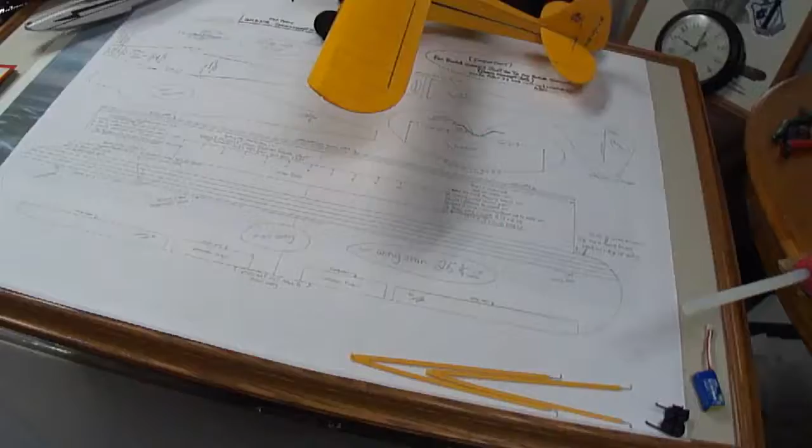Let's see what I got here. I built it out of Great Planes 3mm Depron foam.

Here's a package for it. It's 11.5 inches by 47 inches in length, and it's 3mm Depron. You can get this from greatplanes.com.

You can see right here, here I got a package of it. If you guys order this stuff, it's like 15 bucks for 2 sheets that are in here. I would just go ahead and order 2 packs, like what I got, that way when they ship it to you, it don't get creased or bent. They'll put it in a thicker box.

Alright, now I based this J3 Cub off of the UMX J3 Cub, which I got here. And on mine I went ahead and installed some flaps and all the other little goodies. I got lights on here and everything.

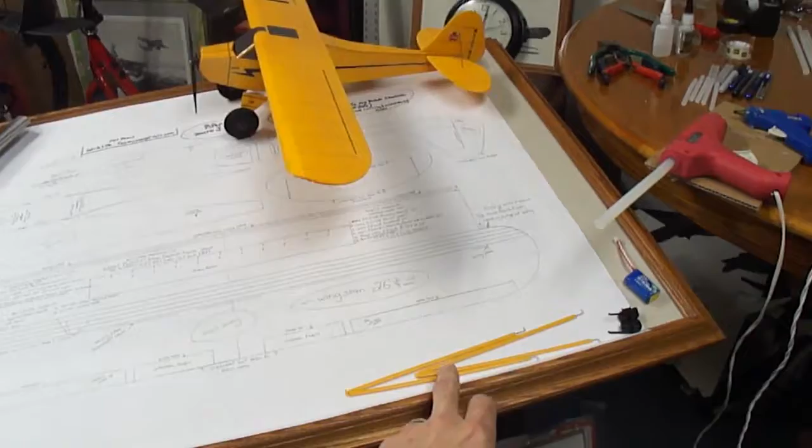And then I went ahead and ordered all the extra parts, like the wing struts, the motors, also the landing gear, and of course the electronics out of the UMX Ultra Micro J3 Cub.

Alright, so what I'm going to start off with here, let's move some of these off to the side.

Now I'm working on another one here. This is based off of the little J3 Cub, you can look it up on YouTube. But this is off the same plans. I just went ahead and removed the tail, the rear of the fuselage, and made my own.

And if you look inside, you'll see I got balsa wood. I just used some lightweight balsa wood, and I went ahead and hot glued it.

And that's how my floats push up through the bottom of the foam into the balsa wood. That's also how I attach the landing gear here, so I can remove these floats and just push the landing gear right through there.

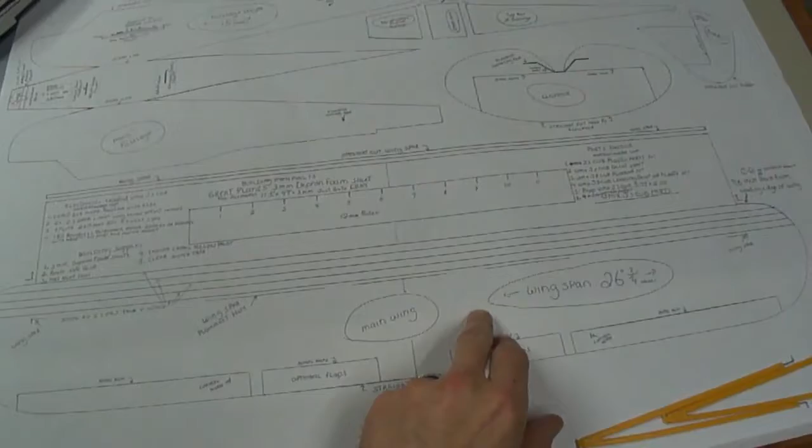Alright, here I got my plans. We're going to start with the main wing. The wingspan's 26 3/4 inches width.

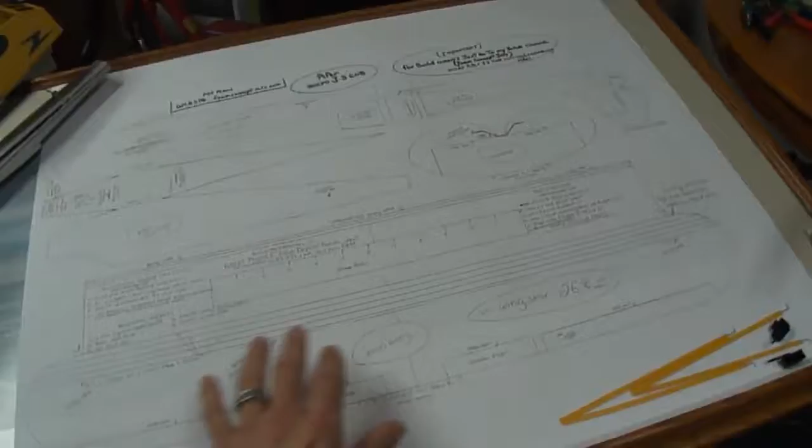Now what I did here, first I'd cut the main wing off the plans, just go ahead and cut it. I already went ahead and cut out all my parts so I can make these videos a little shorter. No sense in sitting there doing all these cuts, they're all just straight cuts.

Here I got my elevator, rudder, main fuselage, top rear of the main fuselage. Got the windshield, and the top of the cowl.

I'm going to go ahead and start with the main wing, which I cut out. I'm going to explain to you how I do this. What I first do is I'll tape the sheet down, tape the plans down on your 3mm Depron. And I went ahead and cut out around the whole main wing.

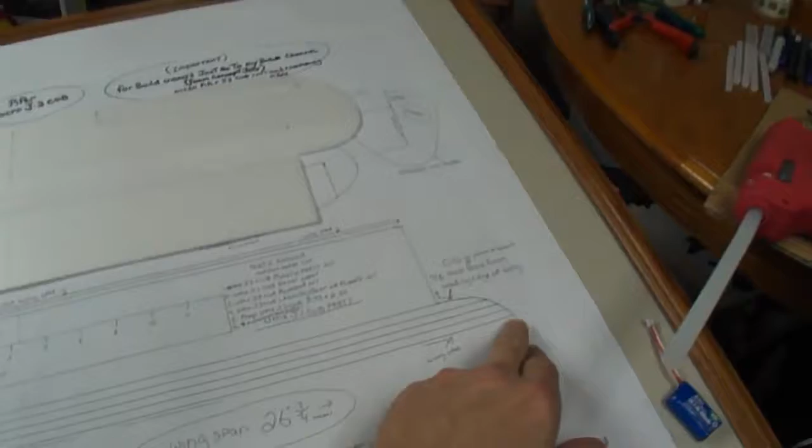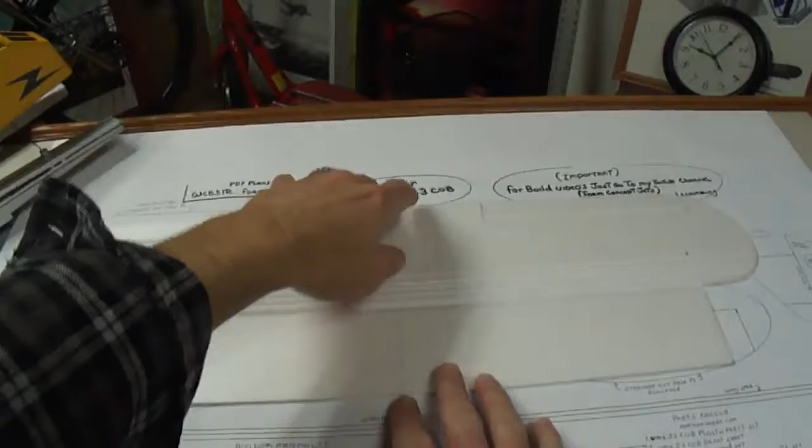Also score all 5 of these lines, and I mean just score down through like half of the 3mm Depron. You can even start by doing that first. Just go ahead and score all 5 of them, then cut out your main wing, just like I did here, which is just like that. Cut it out. Here you can see all 5 lines that I scored.

So after you score them and you cut out the main wing, don't go trying to fold this foam over or anything, because it'll just crack. What I do is where all 5 of these lines are to create the airfoil shape, on the top side of the wing I just put clear Scotch tape. You can see it there. Went ahead and clear Scotch taped the whole airfoil there. Then you can take and flip it back over.

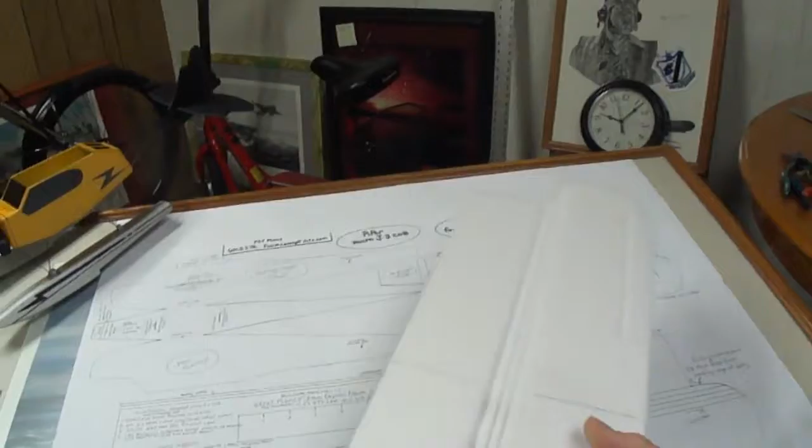And now what I like to do to cut out a V-notch for the main flap of the wing—you can see I cut out quite a V-notch there for the main flap to fold back—is I'll take and cut it on glass. If you lay this down on glass, it's a lot harder to cut through the tape. You can go ahead and V-notch both sides, 45 degrees on both sides of the flap, and you won't end up cutting through the tape.

But just press kind of lightly when you are making your cuts though. So that's what I did, I 45'd on both sides of the line to get the flap to fold back.

And for the first 2 airfoil lines, you can see I cut a V-notch out of just one side of each line, and that'll even give you that extra bend.

And for the last 2 score lines, you can just run—I got a sharp poker stick that I ran down the line to spread it out slightly—because by the time this flap starts folding back, you don't really need these last 2 lines to be V-notched. As you can see, this flap's going to fold back, and you get your airfoil shape.

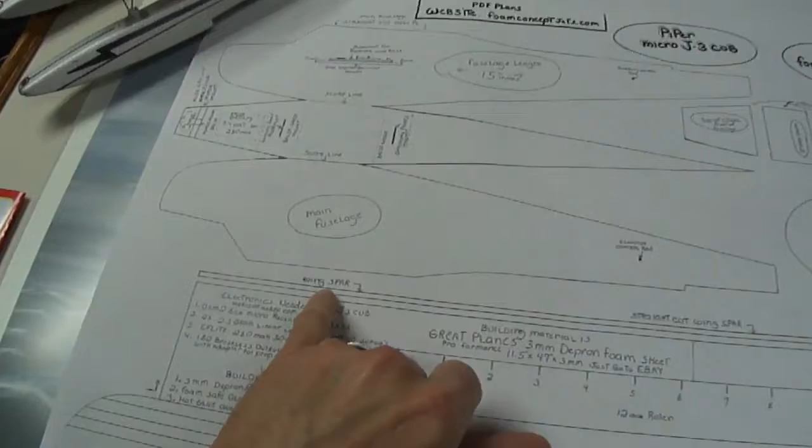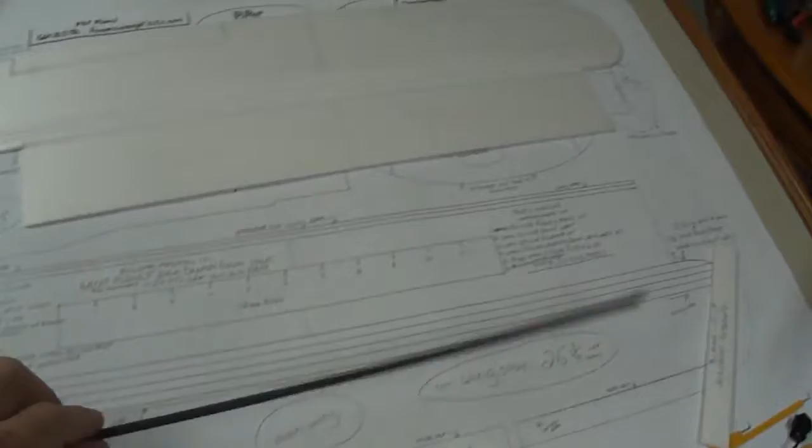Alright, on the plans here I got a wing spar that you cut out of the 3mm Depron if you want. What I like to do is use the Elmer's black foam board. It adds a little more strength to the wing. As you can see what I got here, it's only 1/8 inch thick. On the plans you'll see where it says place wing spar placement. Should be right in this area here.

So let's go ahead and assemble this wing. Also, you can add flaps on the original wing. If you want to add a couple extra servos and put some flaps, you can do that.

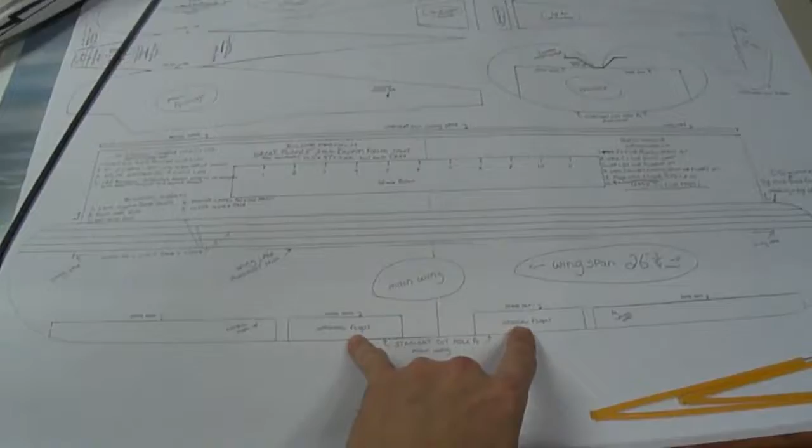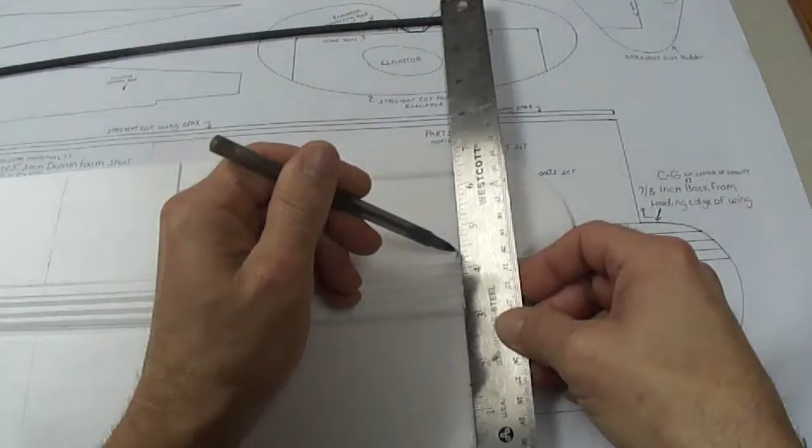So like I said, I went ahead and cut out a wing spar out of some Elmer's black foam board. Now I took a ruler and just set it on the very edge and put a few marks so you know where your wing spar is going to be. As you can see, I got 2 pen marks there.

So I'm going to go ahead and hot glue this down. Make sure you're working on a nice flat surface when you're building your wings. So let's go ahead and apply the wing spar. For the hot glue on this, it's not going to take a whole lot, guys. Just get enough on there and set her on there like so.

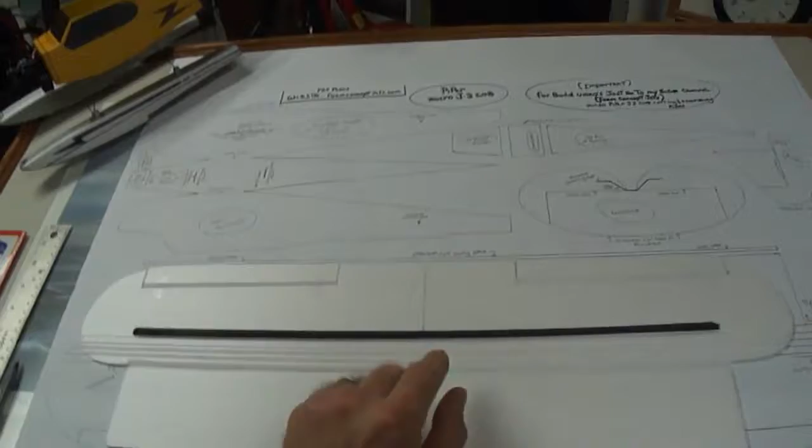So the Elmer's black foam board wing spar will add a lot more strength to this wing. And you guys can even put the 3mm Depron foam wing spar and then add a carbon fiber rod if you want, but I never use the carbon fiber rods. They're expensive, and if you crash, your wing's going to get all banged up and broke anyway, so what's the difference if it's in there?

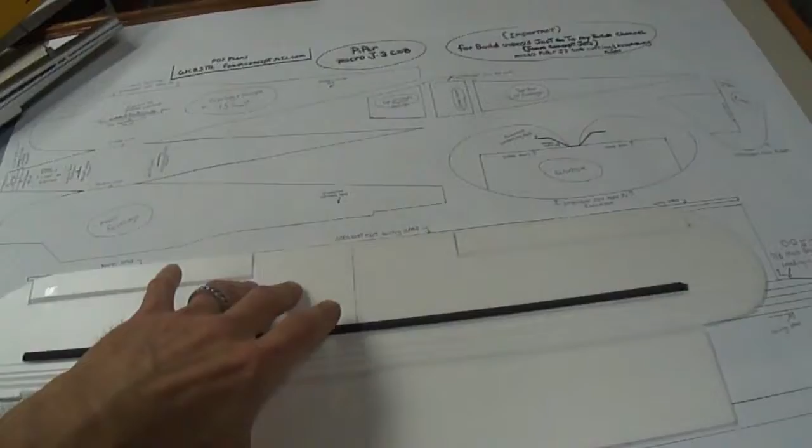I mean, by the time I fold this flap over and glue all this, the wing has got plenty of strength to it.

Like here's the wing from the plans. I went ahead and removed the tape I had holding it. It's got just enough flex in it.

You can see I installed some of all my electronics in there. Now me, I like to be able to remove my wing, so when I go camping or anything, I ain't got to worry about breaking the plane. I like to put it in a little box I got for this plane. And to install my battery, I just drop it in through the top. Now I usually just fold this back down, put a piece of clear Scotch tape here, and it holds it just fine. So I got a quick wing removal system there.

Alright, so again, we went ahead and cut out the main wing. Went ahead and scored all 5 lines to create your airfoil shape. Then V-notch for the flap. Cut out a half V-notch on the next 2 lines back from the flap line. Then I just ran a pen down, or a sharp point poker stick I got, for the last 2. So I barely need that to bend at that point. As you can see, this is going to fold back onto here like so.

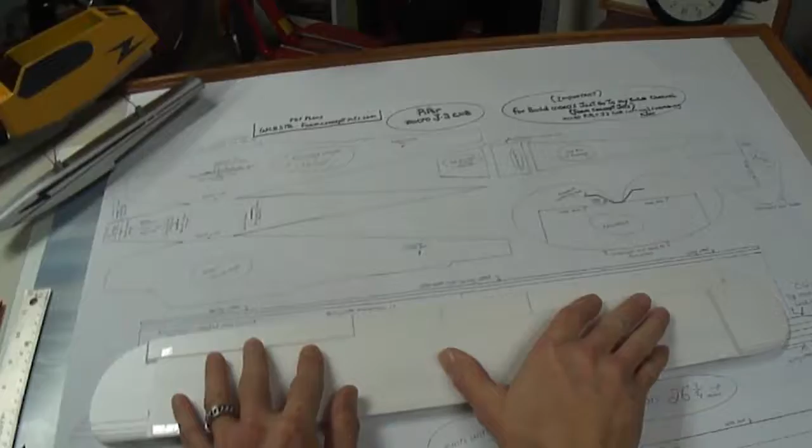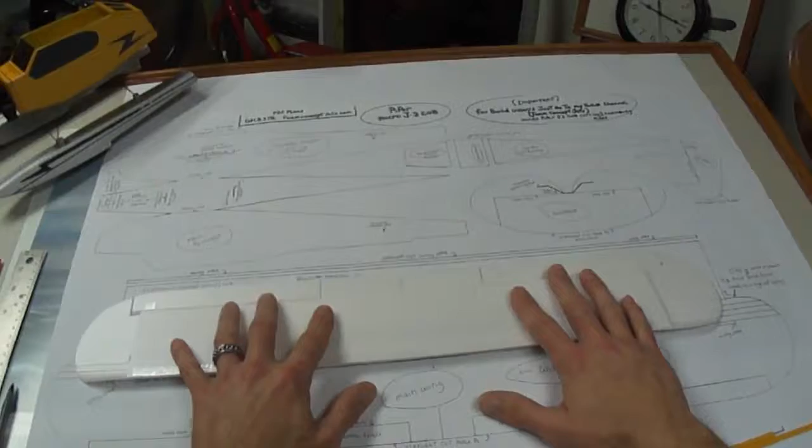Want to let that hot glue set up for a minute. Don't go trying to pick your wing up right away because you'll just knock it out of shape before that hot glue has time to dry. Make sure it's nice and even from the top.

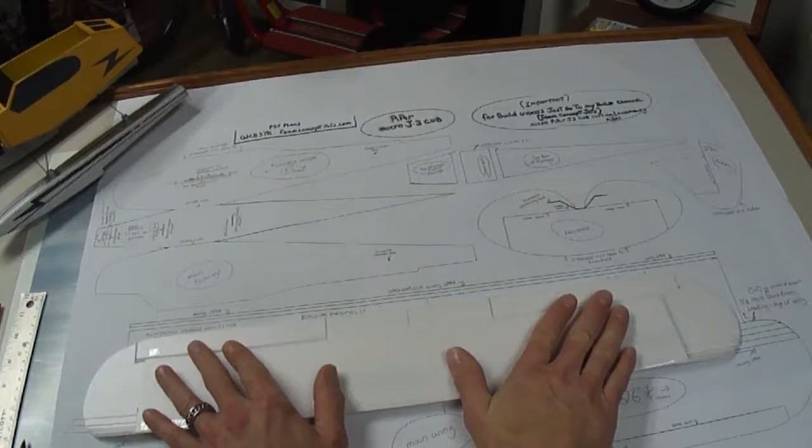Alright, so there we got our flap hot glued back.

Now where the flap meets the bottom of the wing here, I like to use a small hot glue gun to go back and just hit that edge where the flap meets the bottom of the wing. That way you can get a nice little bead on here without burning through the foam or anything. I even like to do half at a time and go back and run my finger down it.

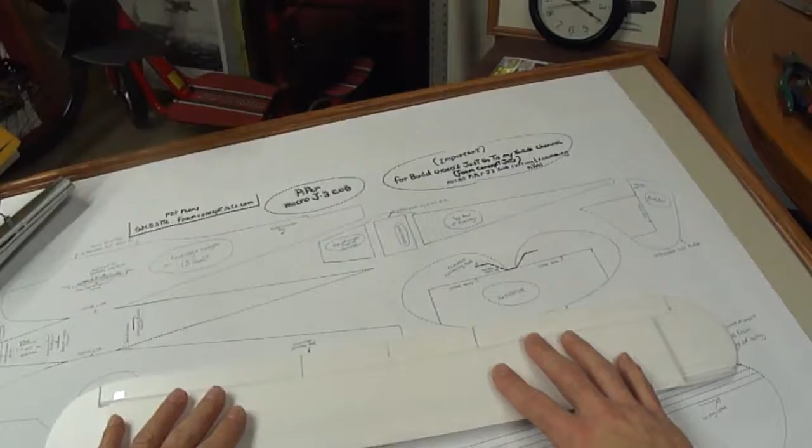So I always have two hot glue guns around. I use the bigger gun for the long runs, and then the smaller gun for the smaller pieces and the detail work.

Alright, so there's our main wing.

Get any of that excess glue off there.

So again, this is my little J3 Cub that I'm building. It's going to be my clipped wing that I'm going to use on here. I just didn't want to waste the foam to build another wing when I'm not building another plane right now.

So there's our main wing with our ailerons all cut out. You can see it's plenty strong enough. It's got just a slight flex in there, which is good for some planes - you want to have a little bit of flex in your wing. For as lightweight as these planes are, it doesn't need to be super strong.

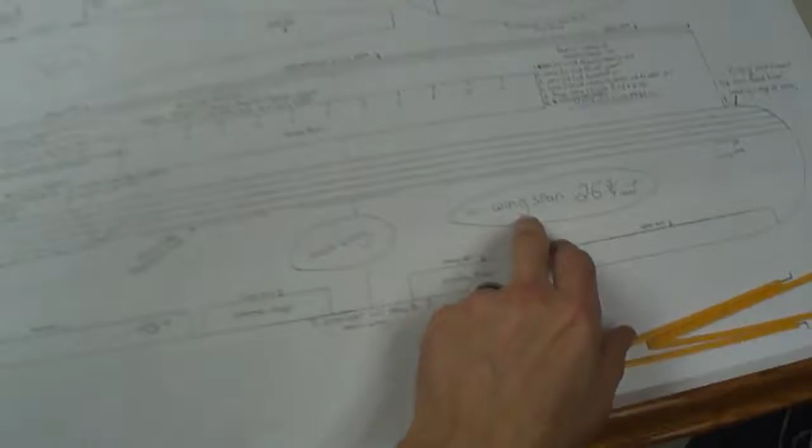Now if you guys don't have a cutting - alright, here I got my plans. We're going to start with the main wing. The wingspan is 26 3/4 inches width.

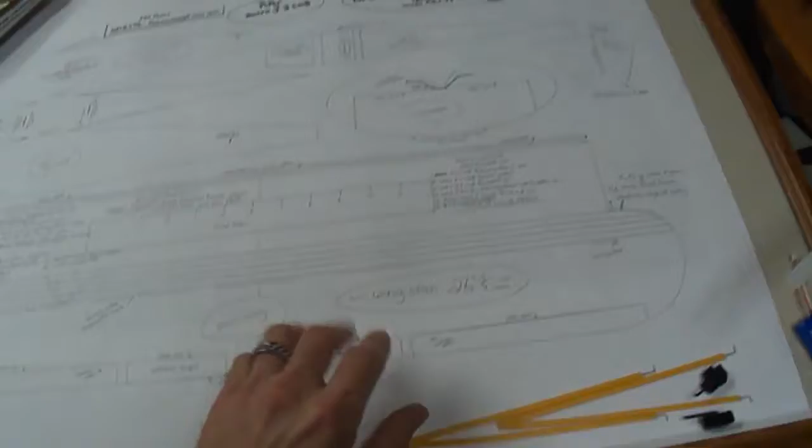Now what I did here, first I'd cut the main wing off the plans. Just go ahead and cut it. I already went ahead and cut out all my parts so I can make these videos a little shorter. No sense in sitting there doing all these cuts - they're all just straight cuts.

Here I got my elevator, rudder, main fuselage.

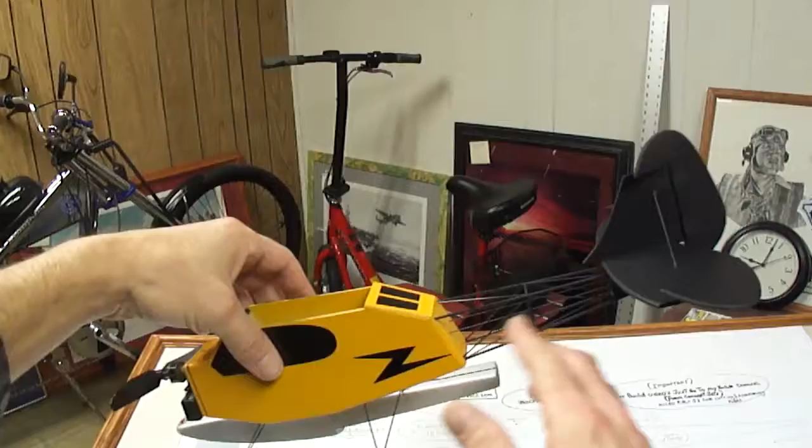Just went ahead and removed the tail, the rear of the fuselage, made my own.

And if you look inside, you'll see I got balsa wood. I just used some lightweight balsa wood. I went ahead and hot glued it. And that's how my floats push up through the bottom of the foam into the balsa wood. That's also how I attach the landing gear here, so I can remove these floats and just push the landing gear right through there.

Also the landing gear, and of course the electronics out of the UMX Ultra Micro J-3 Cub.

Alright, so what I'm going to start off with here, let's move some of these off to the side.

Alright, now I based this J-3 Cub off of the UMX J-3 Cub, which I got here. On mine I went ahead and installed some flaps and all the other little goodies - I got lights on here and everything.